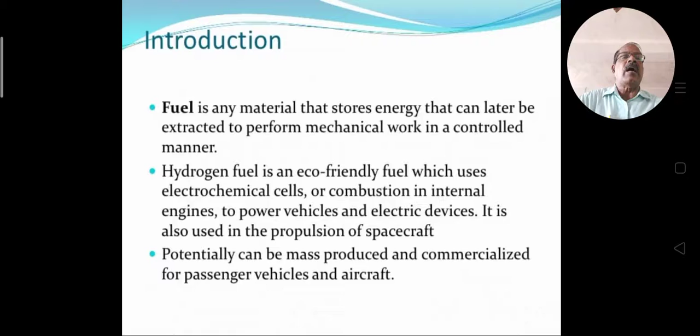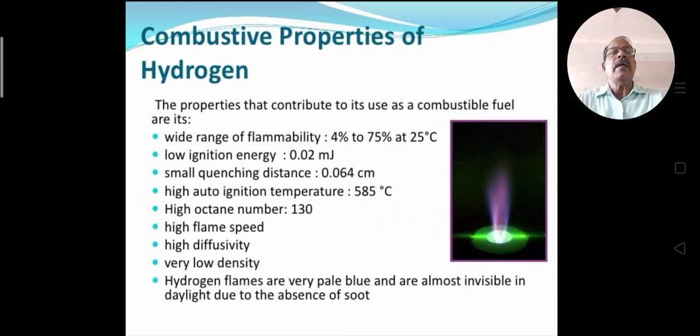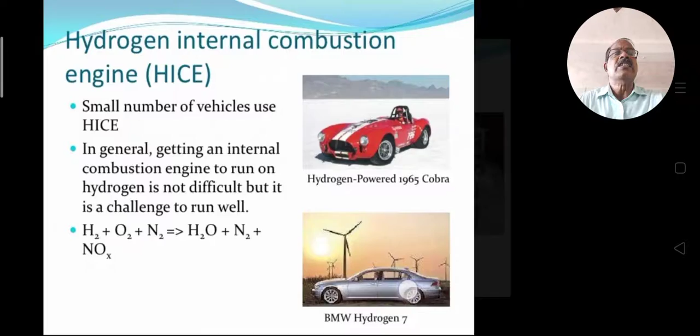Getting it to run on hydrogen is not difficult, but it is a challenge to run well, so it is challenging for these smart cars. Using these cars, we are using hydrogen fuel cells.

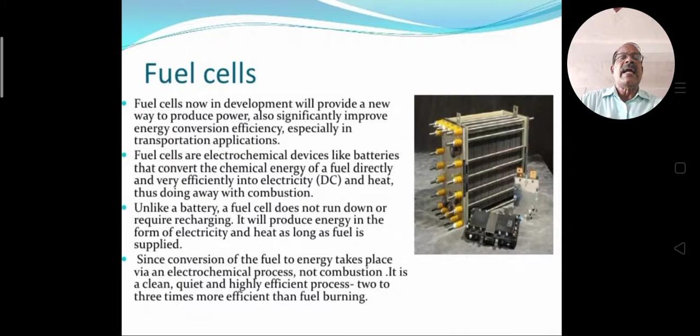Since conversion of fuel to energy takes place via an electrochemical process, not combustion, it is a clean, quiet, and highly efficient process, 2 to 3 times more efficient than fuel burning. In fuel burning there is combustion and it takes more time, but here using fuel cells it is an electrochemical process, not combustion using petrol, diesel, or any other fuel.

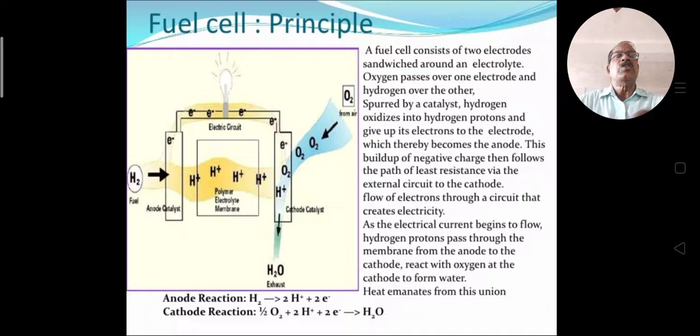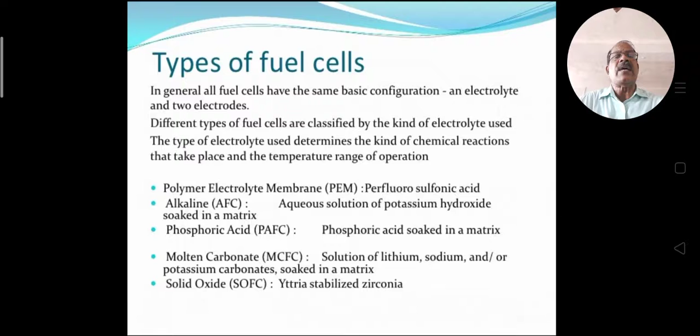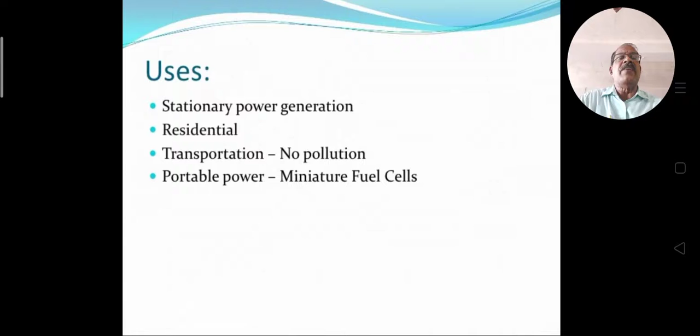What are the uses of these fuel cells? These are used for stationary power generation in residential settings and in transportation. There is no pollution in transportation, and this is a very simple and portable power source. Miniature fuel cells are very small in size and portable, so we can move and transport them anywhere. These are the simple uses of these fuel cells.

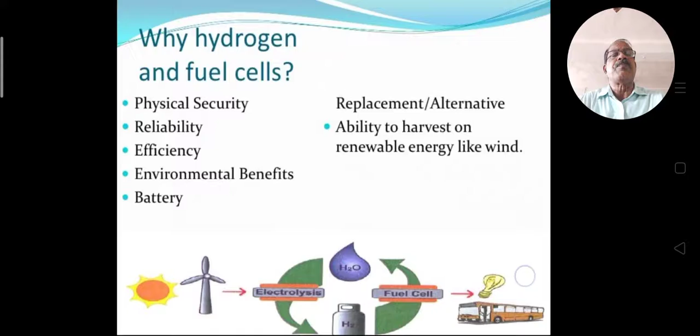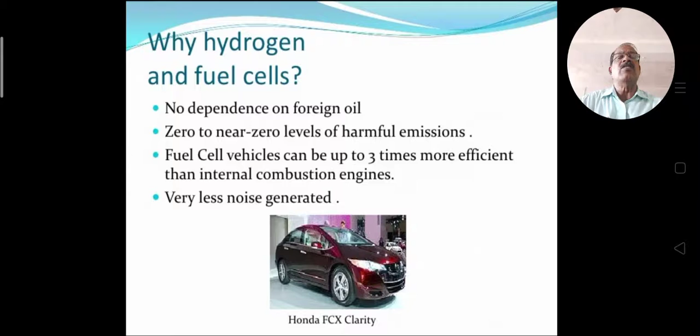There is no dependence on foreign oil - there is no need of oil. So there are zero to near-zero levels of harmful emissions. Fuel cell vehicles can be up to 3 times more efficient than internal combustion engines, with very little noise generated - very smooth engines. Hydrogen engines are very smooth engines. So we are using hydrogen as fuel for transportation of cars and aircraft.

Safety implications of hydrogen fuel: it is colorless and odorless, and mixtures can be a poison for the fuel cell. It is extremely reactive with oxygen and other oxidizers, with low ignition energy. As discussed previously, it has a high flame temperature of roughly 2273 Kelvin, an invisible flame in daylight conditions that appears pale blue, and a negative Joule-Thomson effect. Leaking gas may spontaneously ignite. Small molecular size promotes leaks and diffusion. It has very wide flammability limits in air, and mixtures can diffuse into and react with certain metals, embrittling them. The cryogenic liquid at 20 Kelvin is even colder than frozen nitrogen, oxygen, or argon.

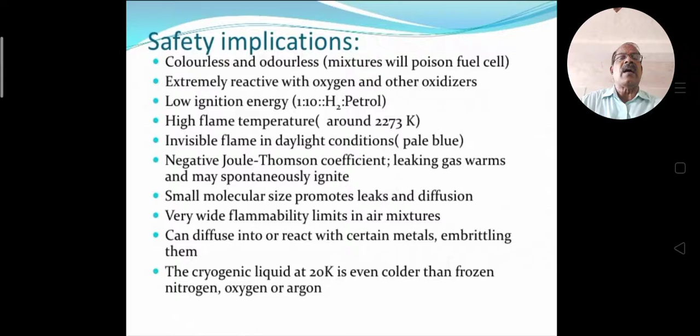These are the safety implications and challenges of using hydrogen as fuel. Infrastructure for refueling, large-scale manufacturing processes, and support infrastructure such as trained personnel are not yet available for fuel cell systems. The fuel cell systems are not yet developed, so there is no trained personnel. This is a major challenge, and refueling requires large-scale manufacturing and more supporting infrastructure.

This is a main challenge with these fuel cells: hydrogen has to be stored on board vehicles, at hydrogen production sites, refueling stations, and stationary power sites, which requires several precautions. It is a very easily flammable fuel, so we must take more precautions with storage. The size and weight of current fuel cell systems must be reduced to attain market acceptance, especially with automobiles, making the fuel cells much smaller. This is a big challenge in the automobile industry.

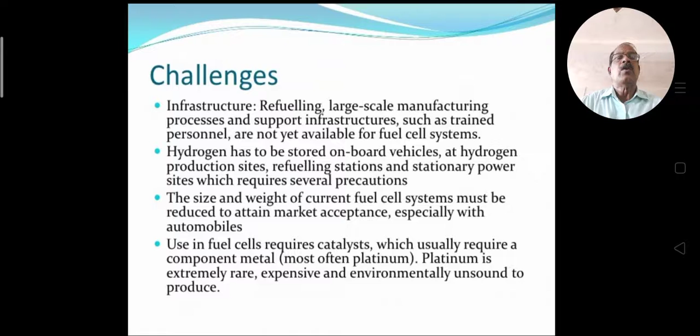Use of fuel cells requires catalysts, which usually require a noble metal component, most often platinum. Platinum is extremely rare, expensive, and environmentally unsound to produce. Fuel cells require catalysts, and generally we use platinum as the catalyst. Platinum is an extremely rare and expensive metal, environmentally unsound to produce. These are the main challenges of hydrogen as a fuel.

Now we are going to discuss hydrogen energy. What are the salient features of hydrogen energy?

Hydrogen has the highest energy content per unit of mass of any chemical fuel and can be substituted in a broad range of applications. Its burning process is non-polluting. Its heating value of 28,000 kilocalories per kg is 3 times greater than hydrocarbons, and it is easy to produce because it is produced from water, found in abundance. And hydrogen is highly flammable.

Hydrogen at ordinary pressure and temperature is a light gas with a density only 1/14 that of air and 1/9 that of natural gas under the same conditions. By cooling to an extremely low temperature of minus 253 degrees centigrade, the gas is condensed to a liquid with a specific gravity of 0.07, roughly 1/10 that of gasoline.

The flame speed of hydrogen burning in air is much greater than for natural gas, and the energy required for combustion is less. Mixtures of hydrogen and air are combustible over an extraordinarily wide range of composition. Thus the flammability limits at ordinary temperatures extend from 4 to 74% by volume of hydrogen in air.

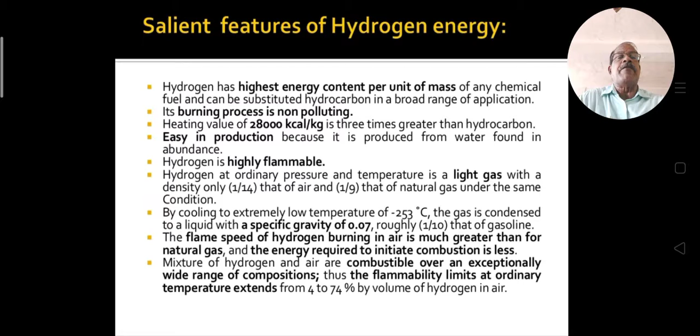This is the simple diagram of electrolysis, the electrolytic production of hydrogen. Here are two electrodes, cathode and anode, and in the center a diaphragm is arranged between these two. Here hydrogen bubbles are formed, and here oxygen bubbles, in the electrolyte solution. Oxygen is released from the right side and hydrogen from the left side. This is the simple standard electrolysis process of hydrogen.

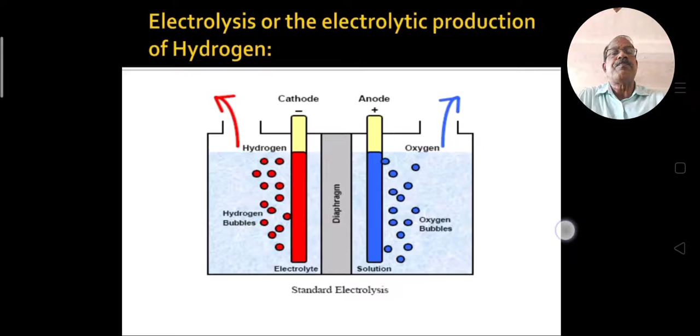The process of splitting water into hydrogen and oxygen by means of a direct electric current is known as electrolysis. This is the simplest method of hydrogen production. In this, splitting of water, H2O, gives rise to H2 plus O2, hydrogen and oxygen, by means of direct electric current.

Although only the water is split, an electrolyte KOH solution is required because water itself is a very poor conductor of electricity. Theoretically 1.23 volts are required for this process, but in real situations, due to the slowness of the electrode process, higher voltages are required for the electrolysis.

Theoretically 2.8 kilowatt hours of electric energy should produce 1 cubic meter of hydrogen. However, the actual electrical energy requirement is generally from 3.9 to 4.6 kilowatt hours per cubic meter. This means that the efficiency of electrolysis is roughly 60 to 70%. To increase the efficiency, the electrode surface must be able to catalyze the electrode process. Platinum and nickel are normally deposited on the electrode.

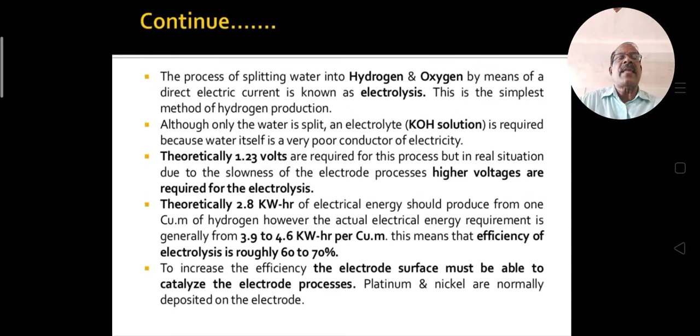Diaphragms prevent electronic contact between adjacent electrodes and passage of dissolved gas or gas bubbles from one electrode compartment to another without appreciable resistance to the passage of current within the electrolyte. Asbestos is the most suitable material for cell diaphragms. There is a diaphragm in between the two electrodes, anode and cathode.

Three major factors determine the usefulness of an electrochemical cell for hydrogen production: energy efficiency, capital cost of the plant, and lifetime of the cell and its maintenance requirements. A number of advantages can be gained from operating the electrolyzer at higher pressure, as follows: reduction in specific power consumption, delivery of gas at pressure, thus eliminating the cost of a gas compressor, and reduction of the size of the electrolysis cell.

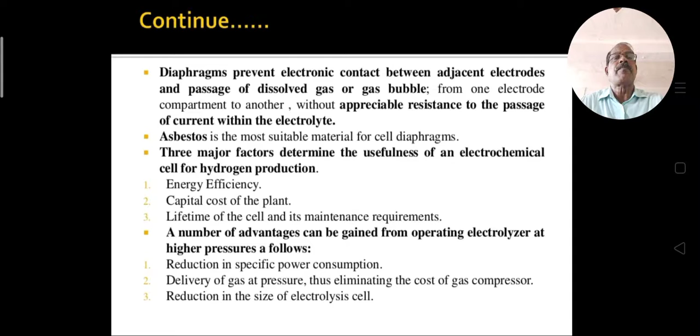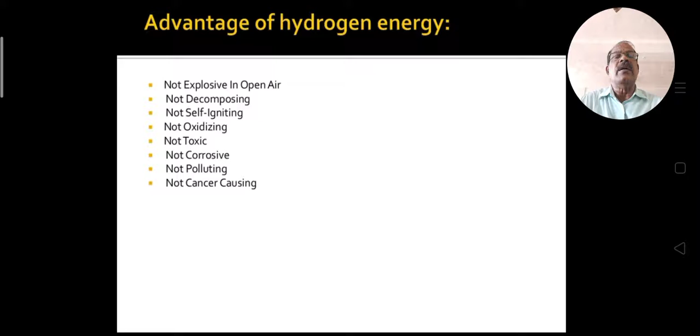The advantages of hydrogen energy: it is not explosive in open air, not decomposing, not self-igniting, not oxidizing, not toxic, not corrosive, not polluting, and not cancer causing. These are the most important advantages of hydrogen energy.

Under disadvantages, there are very few: it is currently more expensive. The cost of hydrogen energy gradually decreases, and our governments give some subsidies to these plants. Now the Indian government is also ready to plant hydrogen, produce hydrogen and use hydrogen as fuel. The central government cabinet also approved plans for these hydrogen plants in our country.

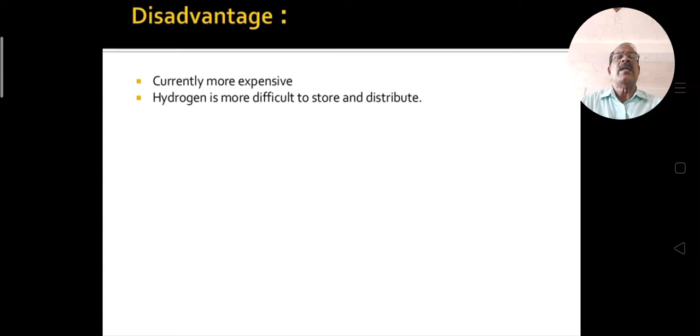Hydrogen is more difficult to store and distribute. This is the main disadvantage. The storage of hydrogen is more difficult, and distribution of this hydrogen is also more difficult. If we reduce this difficulty, we can use hydrogen as a fuel frequently in the future. This is hydrogen energy.